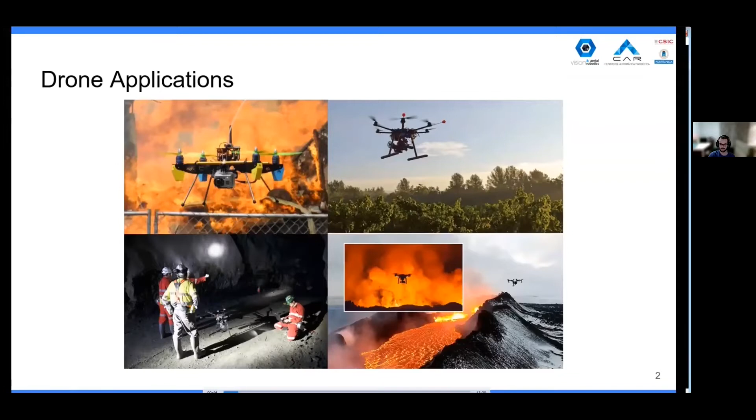However, the short flight time of these aircraft greatly limits their use in long-duration tasks. To address this, it is interesting to develop agile drones that can explore or traverse an area in a short time. Autonomous drone racing is a great environment to push agile drones to the limit. The high speed and agile maneuvers required for this purpose increase the difficulties of localization, control, and trajectory generation.

In recent years, autonomous drone racing competitions like IROS's ADR competition or the more recent AlphaPilot have helped to improve the state of the art substantially. However, autonomous racing drones are still far from reaching human pilot performance, and a lot of research has to be done to accomplish that. To test different techniques to get the best results, it is useful to work in a modular environment that allows you to develop and validate different algorithms independently.

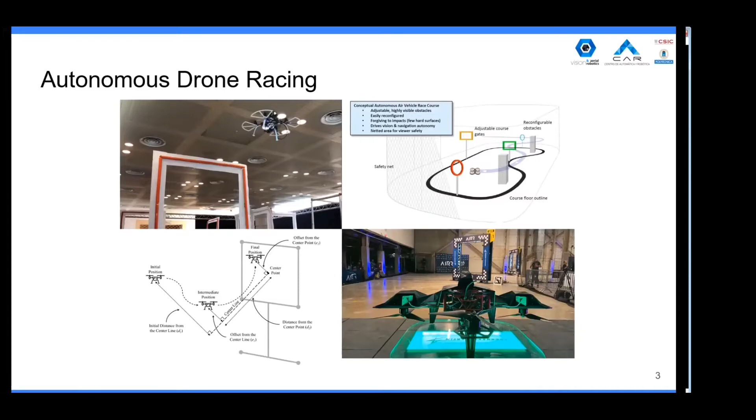In this work, a complete system architecture and an evaluation method for autonomous drone racing research is proposed. The system architecture presented in this work has been developed using the Aerostack framework, an open-source multi-purpose software framework for the development of autonomous multi-robot unmanned aerial systems, created by the Computer Vision and Aerial Robotics Group. The framework architecture is organized in the following layers.

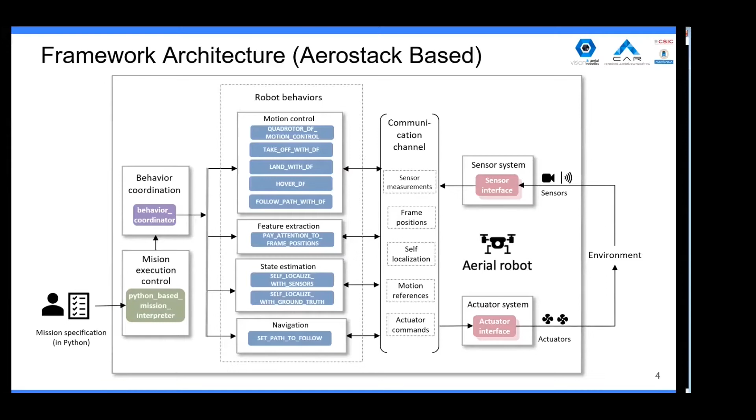The following layer corresponds with the robot behavior layer, in which the robot functional capabilities, including motion control, feature extraction, state estimation, and navigation, are implemented. Finally, the control layer executes a mission plan specified in a formal description. A behavior coordinator component is used to translate planned tasks into consistent activation of robot behaviors. The following is a more detailed description of the robot processes developed.

All the set of behaviors that are responsible for controlling the movement of the drone are included in the motion control layer. This category includes simple behaviors such as takeoff, hovering, or landing, as well as more complex behaviors such as generating a trajectory and making the drone follow it. In order to realize aggressive maneuvers on a quadrotor, it is necessary to employ a nonlinear controller. We have implemented a quadrotor control algorithm based on differential flatness, inspired by the work made by Mellinger et al., with several modifications, so the output of the controller corresponds with the angular velocity reference and the desired collective thrust of all motors.

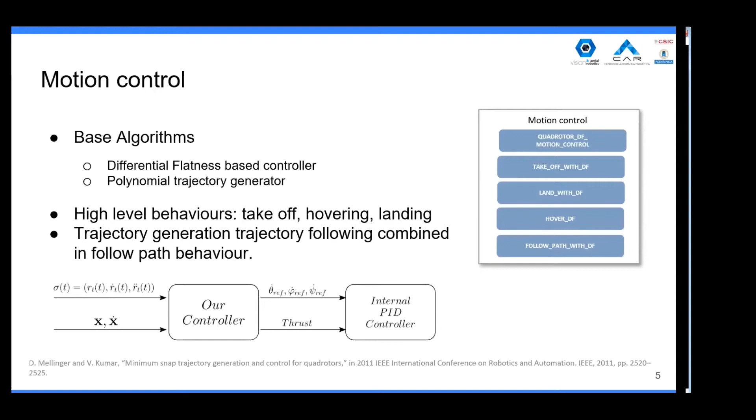The input of this controller consists in the position, speed, and acceleration references provided by the trajectory generator. Due to the need of generating trajectories for the controller, a polynomial trajectory generation has been used. The trajectories are generated on a set of waypoints and are optimal in snap, which guarantees smoothness in the actuator commands.

In order to achieve the level of control required, it is necessary to provide the best state estimation possible to all components involved. Aerostack Framework already provides multiple components for this task, obtaining data from multiple sensors such as cameras, for relative positioning to a certain object, IMU, laser sensor, depth cameras, or LiDAR. However, for the real flights, we decided to use the state estimation provided by an Intel RealSense T265 tracking module due to the ease of use and the reduction of the computational load of the onboard computer. Moreover, support for motion capture systems like OptiTrack is also integrated.

Perception is a key problem in the proposed scenario, since UAVs need to detect and locate each of the gates accurately to be able to complete the full track. Since the detection and pose estimation of the gates is a difficult problem itself, to evaluate the rest of the proposed framework components without the influence of possible errors in perception, we place ArUco fiducial markers in each gate to estimate the relative position to the UAV's main camera. Each marker also encodes a unique gate ID, enabling us to design arbitrarily complex tracks.

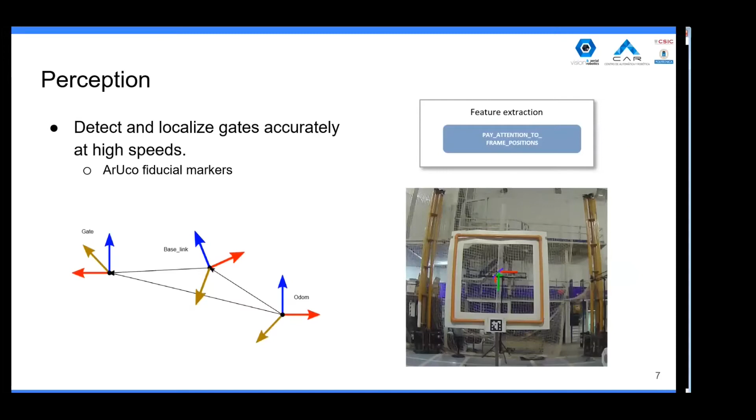When the gates are located in the real world, it is necessary to plan the path that the aircraft must follow to pass through them and avoid other obstacles. For this approach, we consider two scenarios. In the first one, lack of knowledge of gate position is considered. The aircraft does not have any information about where the gates are located, so it has to begin looking for them in order to generate the waypoints to pass through the gates. As the aircraft passes through the circuit, new gates will be in sight, so the quadrotor can add these gates to its route. In this scenario, the aircraft is always considered to see at least the following gate.

On the other scenario, we consider gate position awareness. The aircraft knows an approximate position of each gate of the circuit, so it can generate complete trajectories through all the circuit that must be corrected as the gates come in sight. So it has to update the initial gate positions to pass through the circuit. This is how the majority of the autonomous drone racing competitions work. In both approaches, each gate center is treated like a waypoint in the path, and this waypoint position is updated as the quadrotor flies through the circuit. Whenever the quadrotor passes through one gate, this gate center is removed from the path.

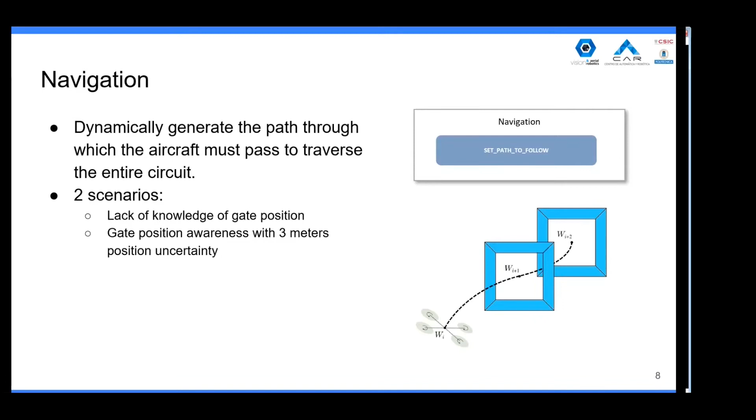The following are the different experiments that have been carried out to validate the performance of the proposed framework. First of all, simulation experiments were done trying to accomplish a 5-gate circuit using the state estimation provided by the simulator. Then, two types of experiments were performed in a real environment. The first consisted of passing through a single gate at different speeds. In the second one, the objective is to go through a small circuit of 4 gates. In both experiments, the state estimation provided by the Intel sensor is used. However, in the first experiment, the motion capture system will be used to measure the error made by this sensor.

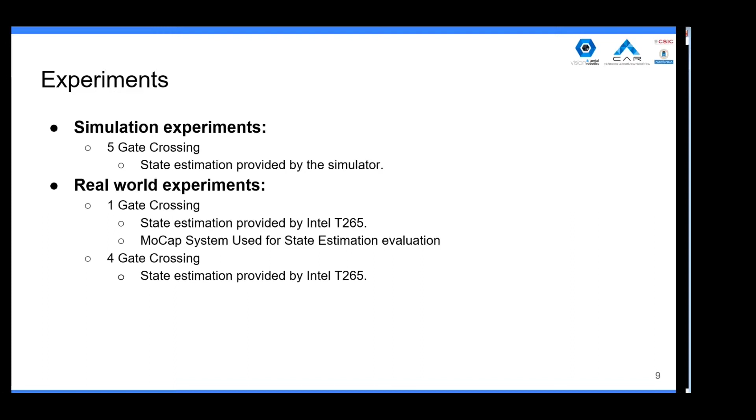To measure the performance of the proposed system architecture and the switchability of the different algorithms selected, several metrics have been used. For measuring the accuracy of the state estimation algorithm, we compute the root mean square error between the estimated state and the ground truth. To evaluate the performance of the controller, we decided to measure the trajectory following error, calculated with the root mean square error between the trajectory sent by the trajectory generator and the real trajectory followed by the aircraft. In autonomous racing, other metrics like the maximum speed reached, the mean speed, or the elapsed time to go through all the circuit must be taken into consideration. All metrics from the different experiments were obtained automatically using an evaluation script on the raw data recorded during the flights.

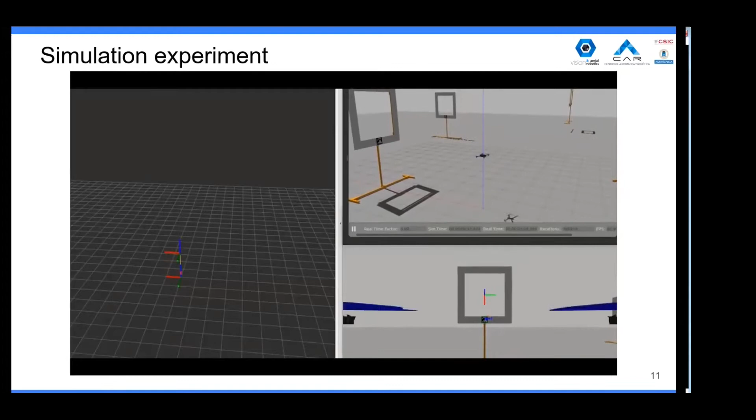We use Gazebo Simulator for the simulation experiments. Here, a video of the system working can be seen. In the bottom right, a first-person view of the aircraft is shown, while in the left part, the data acquired during the flight are plotted. In green, we can see the trajectory generated, and we can observe how it changes when the estimation of the gate position is updated.

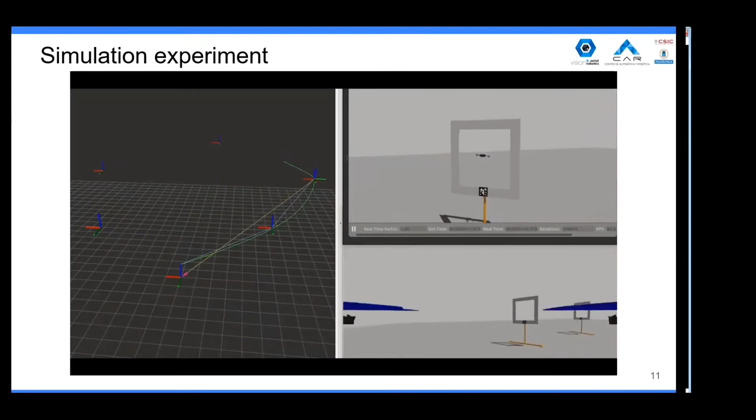The aerial platform used for the real experiments was a custom quadrotor, based on the DJI F330 frame. This platform was equipped with a Pixhawk 4 Mini as the aircraft autopilot, an Intel RealSense T265 tracking module used for state estimation, and a USB fisheye camera for the gate detection.

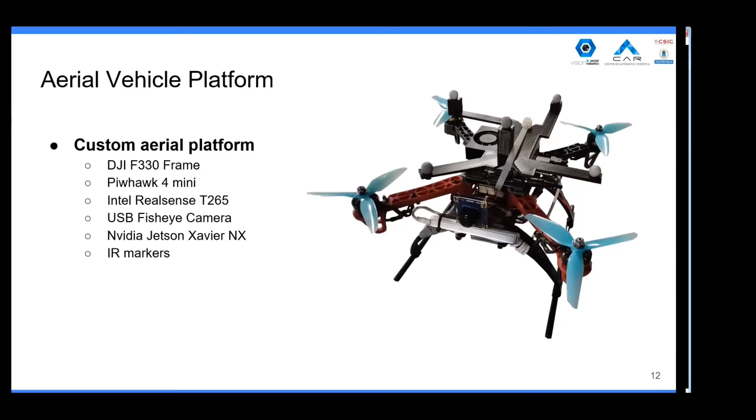Additionally, the aerial platform was equipped with a single board computer NVIDIA Jetson Xavier NX for onboard computing. All computation required for the real experiment occurred in this single board computer. In order to obtain the ground truth position of the aircraft during some experiments, a motion capture system was used. For localizing the aircraft inside the motion capture system area, several IR markers have been attached to the platform.

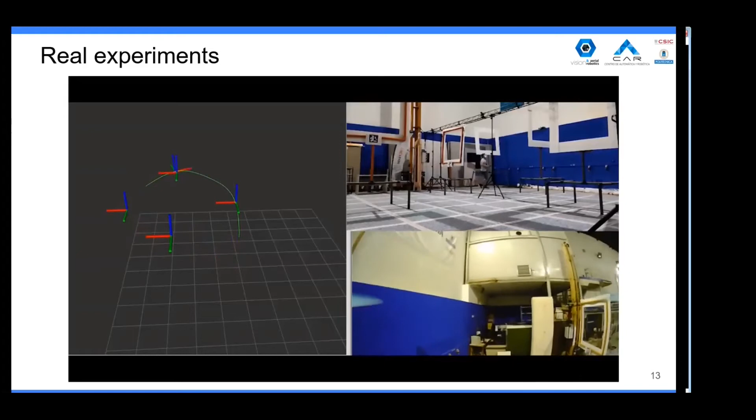Here, we can see the real flight experiment trying to pass through 4 gates. In the video, a security pilot follows the drone, but he does not take the drone control at any moment.

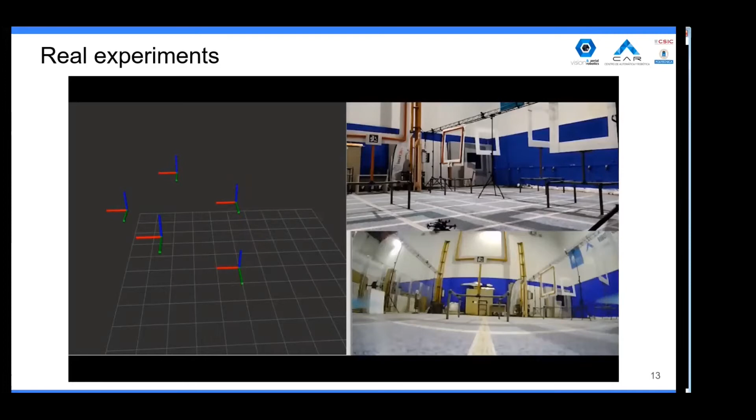As we could see, on the simulated flight, the system was able to complete the whole circuit at different speeds, reaching speeds up to 3.2 meters per second, with a trajectory following average error around 15 centimeters, which validates the basic operation of the system.

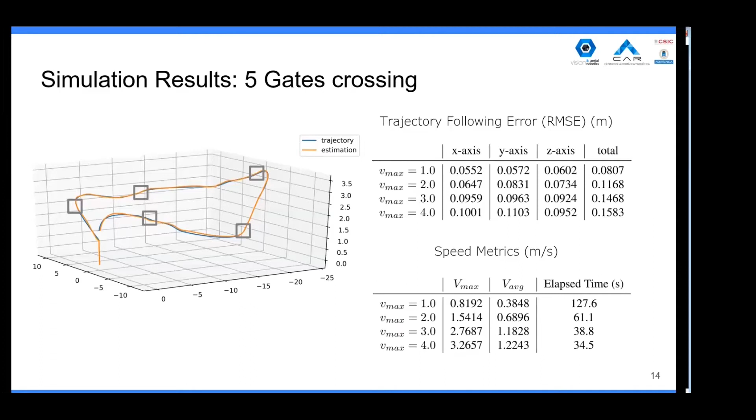To sum up, in this work, a modular framework for autonomous drone racing has been proposed and validated through several experiments, not only in simulation, but also in real environments, being able to fly up to 4.16 meters per second, and to go through a small circuit successfully using onboard computation. The state-of-the-art algorithms proposed for each module, combined with the evaluation metrics proposed, constitute a baseline for research on improving autonomous agile drone flying.

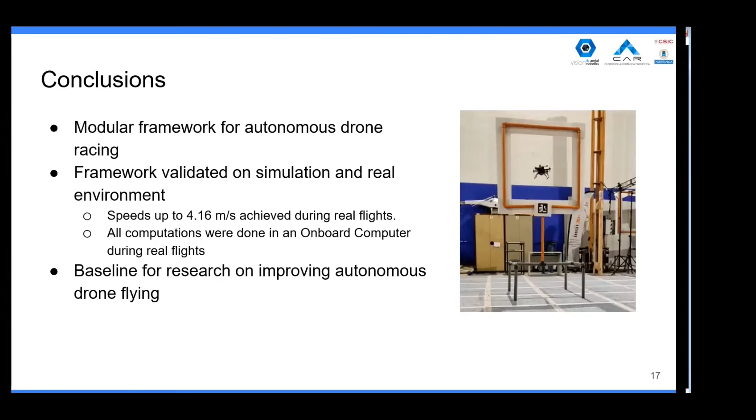To improve this framework, a wider range of possibilities to choose for each module must be given, like adding model predictive controllers, learning-based gate estimation methods, or a visual inertial odometry estimator fused with other sensors to improve the state estimation. Moreover, the domain gap between simulation and real life is substantial when non-photorealistic simulators are used. Using a simulator like Flightmare or FlightGoggles will help to develop and test algorithms that rely on images taken through the flight.

Our topic is a decentralized trajectory generation technique for multiple systems. First, I will give the research motivation. Then I will propose the detailed method. Finally, the experimental results will be given.

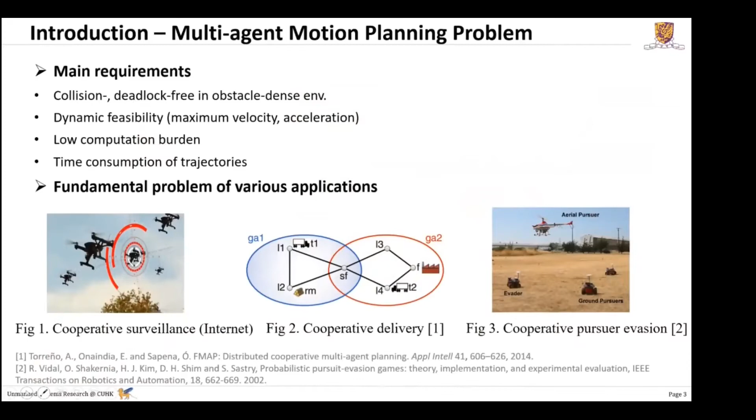Recently, multi-agent systems receive much attention due to many applications such as cooperative surveillance, cooperative delivery, and cooperative pursuit-evasion problems. It requires generating safe, dynamically feasible trajectories in short time given the environment. However, it is challenging to satisfy all the requirements.

There are many studies on the multi-agent motion planning problem. One popular approach is the centralized optimization method. It can generate optimal trajectories without deadlock, but it requires time to generate these trajectories, especially for large teams, and it may have high time consumption and may fail due to optimization failure.

Another method is decentralized planning. Decentralized planning is receiving much attention due to its scalability. However, such distributed methods cannot guarantee completeness and may get stuck in obstacle-dense environments.

In this work, we will focus on a decentralized multi-UAV trajectory generation method. Our goal is to generate smooth, safe, fast trajectories for multiple quadrotors in cluttered environments, given the initial and terminal conditions.

We propose a decentralized meta-heuristic gradient-free method based on MPC. This method has less computational burden, with boundary-state-constrained trajectories approximated with a neural network. It also reduces the time consumption of trajectories and avoids deadlock.

In our work, the planning problem of each quadrotor k is formulated as an optimization problem. We design the cost function in terms of smoothness, target position, and obstacle avoidance. We use state estimation and prediction to avoid dynamic obstacles and use a cost-to-go map to avoid static and non-convex obstacles. The optimization constraints for quadrotor k have three terms: the model of the quadrotor, dynamic limits, and boundary states.

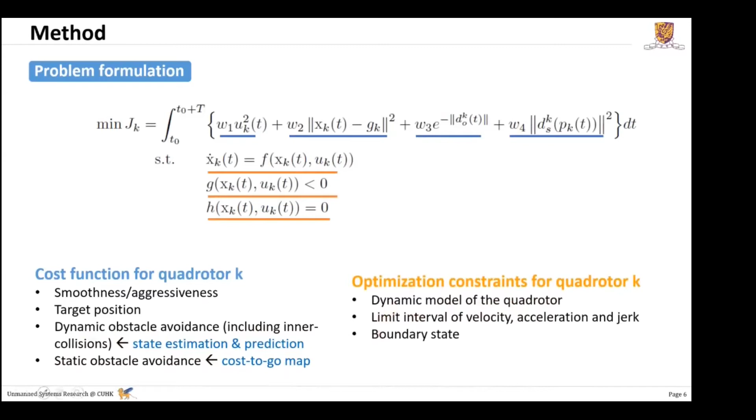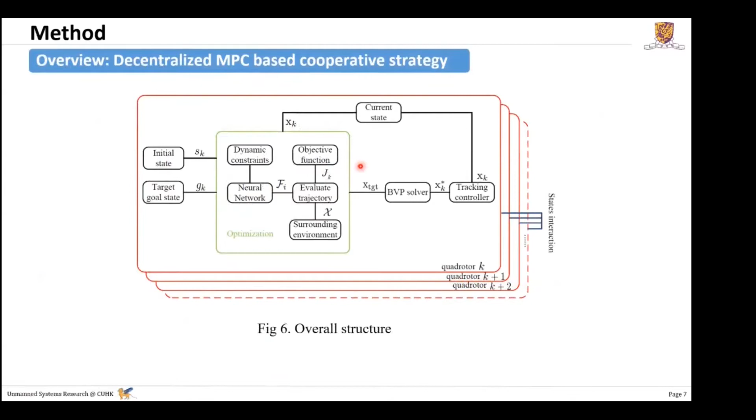This is the overview of our algorithm: a decentralized MPC-based cooperative strategy. First, we set up the boundary state of this problem. Then, we use particle swarm optimization, a gradient-free solver, to select the relatively optimal states while minimizing the cost function. The reason why we choose this gradient-free method is that the replanning time is more uniform and thus can improve the success rate.

For each replanning process, the states of all quadrotors are predicted and considered in their objective function. The relative closest distance between the predicted trajectory of a quadrotor and moving obstacles is obtained through computation. Besides, there is a guided map to avoid deadlock.

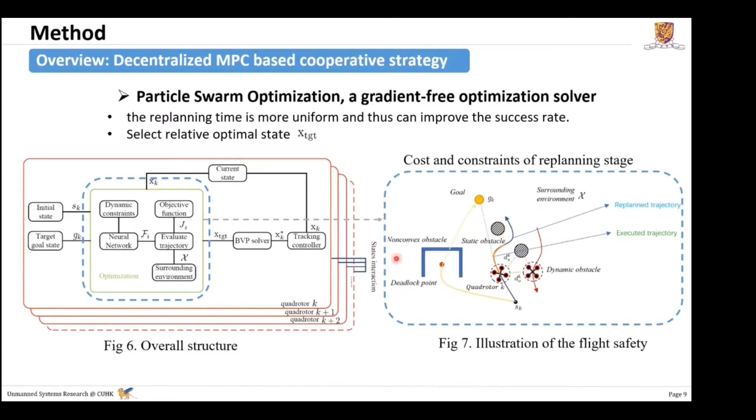Finally, after obtaining this relatively optimal target state, a series of reference states xk can be generated by solving the two-point boundary value problem. The first few states will be given to the low-level dynamic controller, thus recomputing the system state, and the current state xk can be returned for the next replanning horizon.

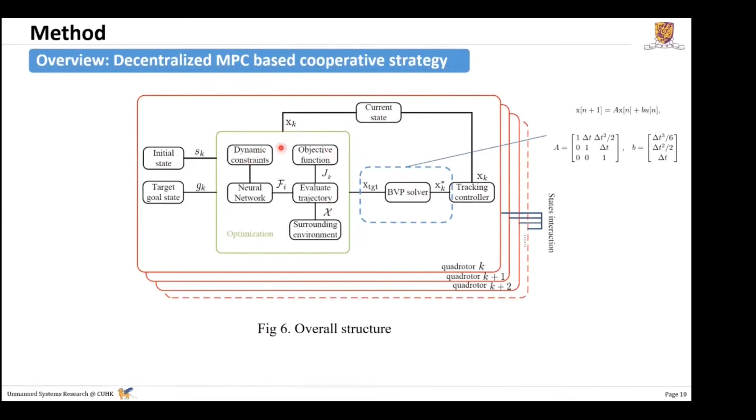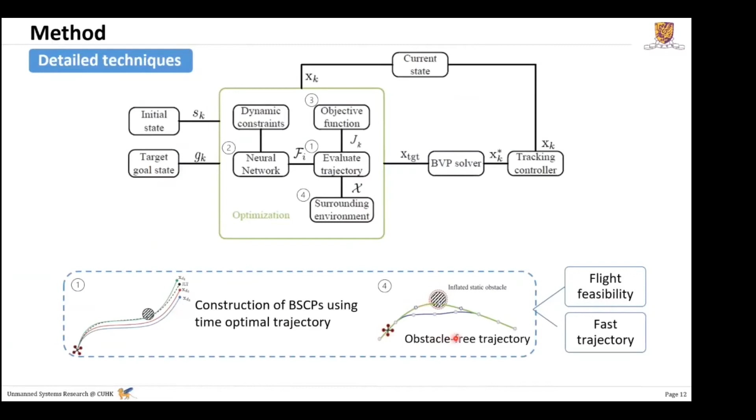The first part is the construction of the boundary state constrained primitives, using time-optimal trajectories to get smooth and fast trajectories, and using the optimal control method to get obstacle-free trajectories. Given arbitrary initial states and target goal states, a time-optimal trajectory can be obtained by choosing the minimum, maximum, or zero jerk. It is proved that this trajectory is well suited for the dynamics of the real vehicle.

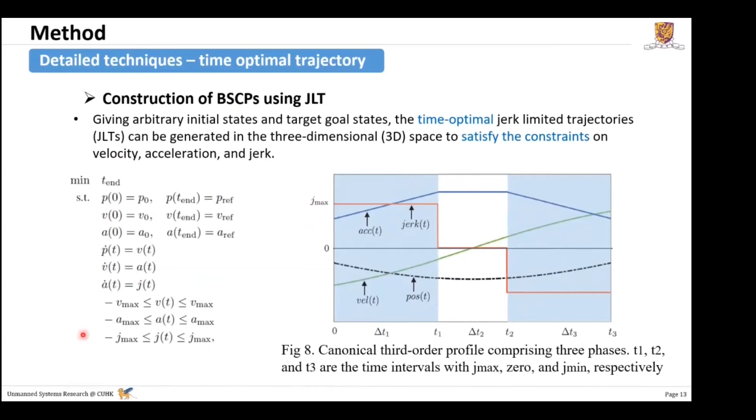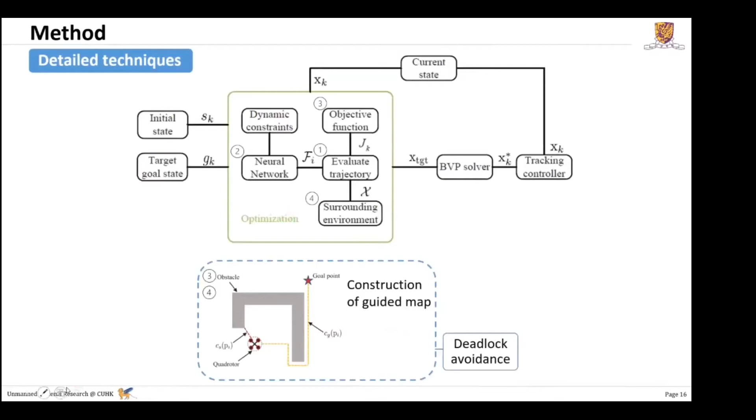For the non-convex obstacles, we use a guided map. The map includes the cost-to-go value to the goal and the safety value, the closest distance to the obstacles. After we get this map, we can use it to get the optimal action at each cell.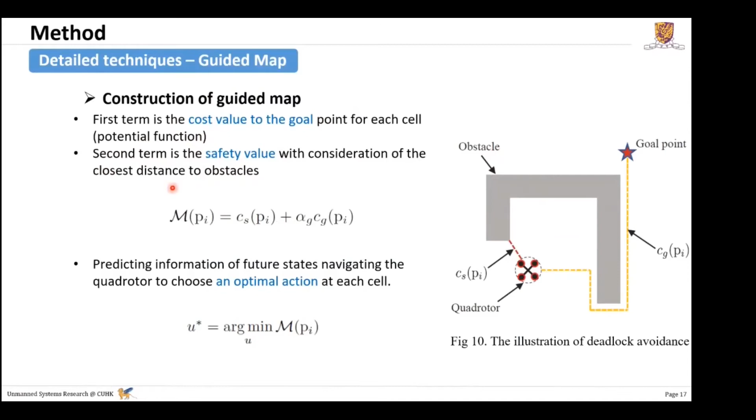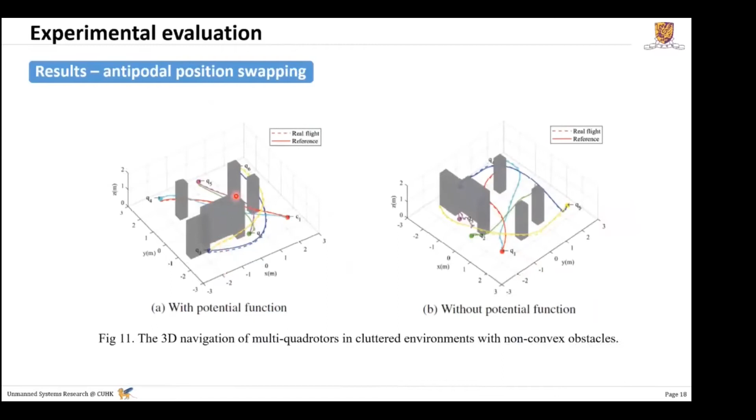This figure shows the performance of this guided map. If we don't have the map, the purple one may get stuck in this environment. After using this map to predict the information of future states and navigating the quadrotor to choose an optimal action at each cell, it can reach its destination successfully.

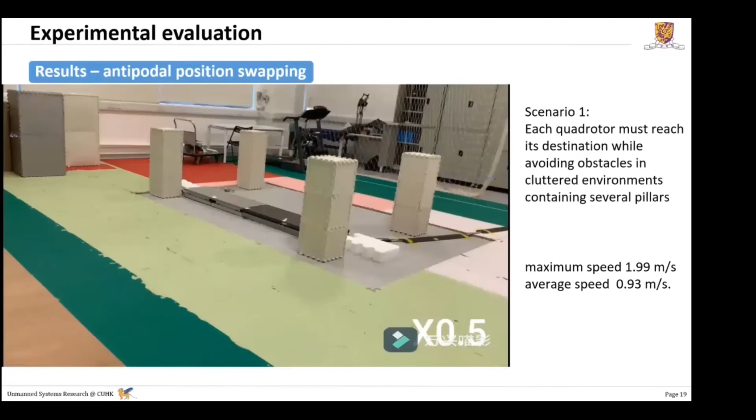Next, we will show the results of antipodal position swapping. Each quadrotor must reach its destination while avoiding obstacles like several pillars. In scenario 2, each quadrotor must reach its destination while guaranteeing flight safety in the vertical axis.

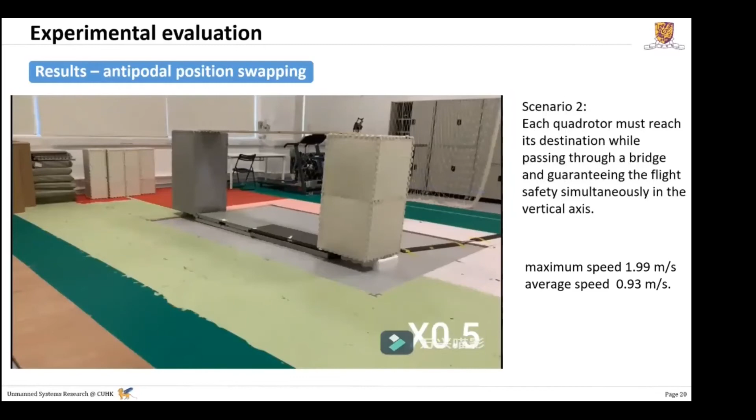In scenario 3, the quadrotors must reach their destinations while avoiding deadlock in the non-convex obstacle environment, like this.

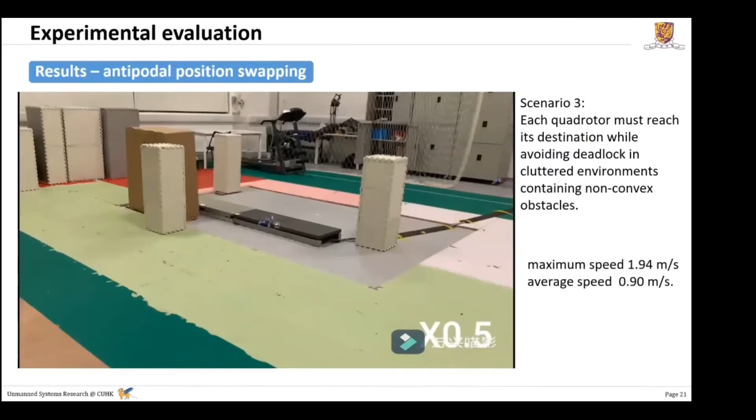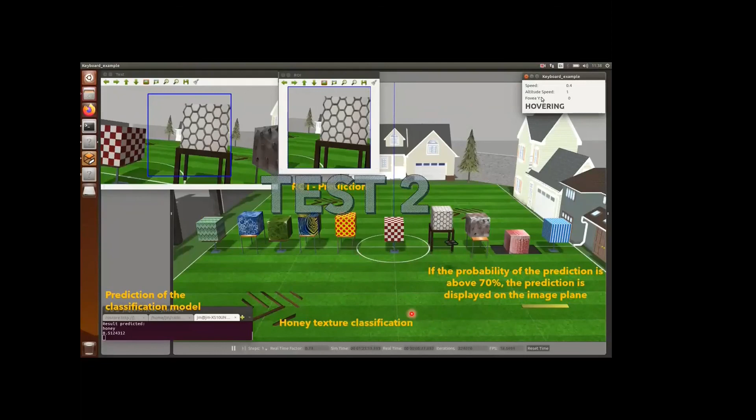Well, okay, in the conclusion of this work, there are 3 main topics. Number 1, localization and object detection tasks using visual information are challenging, particularly when objects exhibit repetitive texture. However, this opens opportunities for various applications using micro aerial vehicles equipped with onboard cameras for object detection and recognition. For instance, parcel pickup, place recognition, and landing zone detection.

Number 2, seeking to improve detection and recognition, in this work we have investigated the use of spectral analysis in combination with deep neural networks. In particular, in this proposal, we merge the additionally created spectral Fourier maps into CNN learning. Also, it's shown that the model we use managed to eliminate overfitting and achieve better accuracy in the classification of texture.